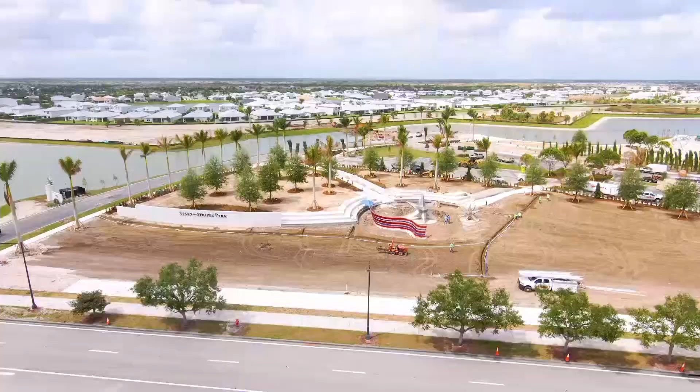The Naturally PSL initiative is a perfect example. Through the Naturally PSL Green Spaces and Places initiative, 744 acres of land will be developed as green spaces and places, including 198 city-owned natural preserves, 6 parks to be opened or improved, and 20 new miles of trails.

Tonight's awards honor the change makers among us, the individuals and groups who planted trees, cleaned up waterways, created Florida-friendly yards, and inspired the next generation through student-led projects.

We've launched a citywide innovation project by teaming up with the Bloomberg Harvard City Leadership Initiative, Center for Public Impact, and the Bloomberg Center for Public Innovation. Over the course of a year, we've worked with over 1,000 residents who generated 1,000 ideas, and all this work led to the city being declared an All-America City.

Let's continue to show the nation what Port St. Lucie is made of. Congratulations, Port St. Lucie.

Madam Mayor, that does not happen by mistake. If you really think about that accomplishment, how many years did it take for Port St. Lucie to get to this level? And it took this council, this staff, to make that happen. I'm so proud of the team that we have. But that's in the past. We can't dwell on the past because we've got to look into the future. As we always say, you're only as good as today. You've got to look ahead on what's next.

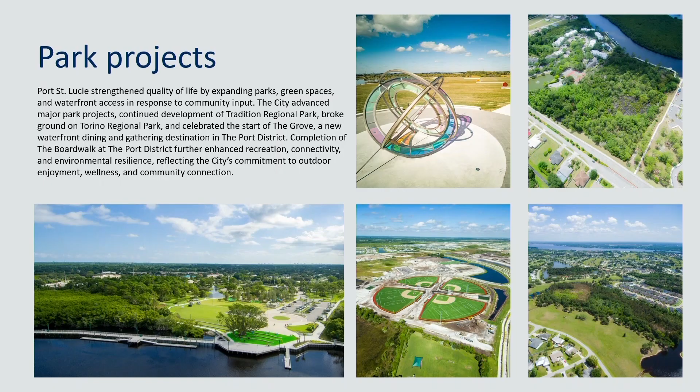All I'm going to say is Southern Grove - tremendous opportunity. I can assure you within the next week an announcement will be made that is going to make all of us proud, something we've all been looking forward to and wanted here. So that's all I'm going to say, but I think we're all going to be proud.

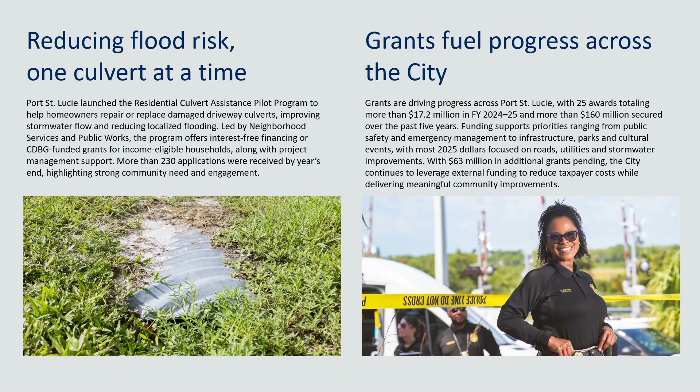Another area we need to improve is our flooding. We know we have flooding throughout the city, but I know Public Works staff is really focusing on how we get some of these culverts replaced and how we lower the amount of flooding we get throughout the city, specifically in the center of the city. That's an area we really need to focus on. Last year we increased our stormwater fund - a slight increase - and most likely there's going to have to be a future increase, but we'll look at the numbers and see where it lands. The bottom line is we are beginning the design process for some of those improvements.

One of the things I've always thought about is, I kept saying we need to be known worldwide - well, what is worldwide? But I think we've put our mark worldwide with Bloomberg and what this team, council, and staff have truly accomplished. I can see great things for the city. We're getting residents and other cities coming here to see what we're doing. I'm really proud of the city and staff on what we've been able to accomplish as a team, and there's a lot more to come.

This is one I'm very, very proud of, and this is really something the residents wanted, council wanted, and also the staff. Needless to say, we purchased 256 lots, 256 acres of land last year. The city eliminated over 1,000 houses from going in this past year. So that is something to be proud of.

This is just a small indication of where our dollars are going, just the general fund alone. Look at the improvements on our investment in capital projects. Why? Because the need is there. We need to invest into not only our buildings and facilities, but really the overall general fund. It's just needed - you know, just the improvements we made there at City Hall, on the lobby. These are facilities that have been there for over 30 years and really needed a small facelift, and there's more to come.

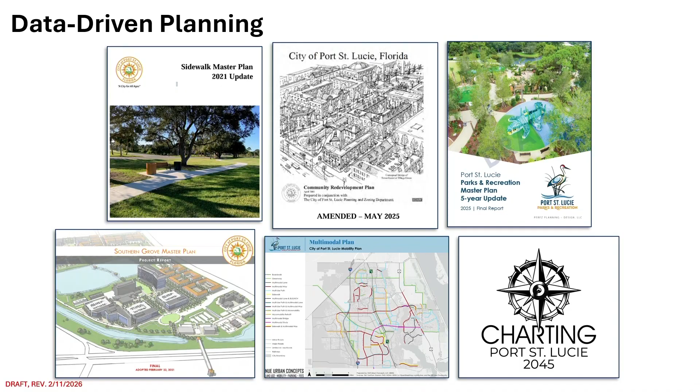Among the challenges especially unique to the city of Port St. Lucie and the Treasure Coast region is the rate of growth, growth that has arrived much more quickly than original projections, which makes things even harder. When you have a longer view on growth, it's a lot easier to get all the infrastructure in place to handle it. But the pace at which the city has grown is really remarkable in the region and in the state.

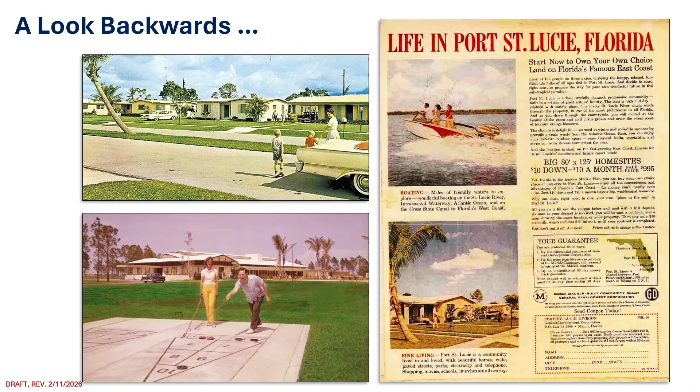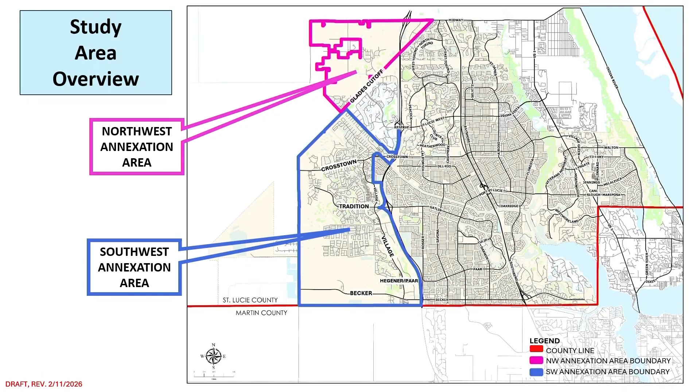When we think about the study area we were challenged to look at, this map shows the city, and our study area is really the southwest annexation area, identified in blue, as well as the areas that influence what happens there. The city now also has a northwest annexation area, shown in pink. The developments that have already arrived on the ground in the southwest area are identified in color.

Now, I was thinking about today's presentation, and it was nostalgic. I've been with the Planning Council 22 years as of next month. When I started, one of my first jobs was analyzing the transportation impacts of these DRIs. So it really has come full circle.

Back then, when I went out and did field work to understand what's coming in this area, there were mostly cows. It was really hard to envision that this would total 75,000 people in this area and around it, all fighting for space on the transportation network.

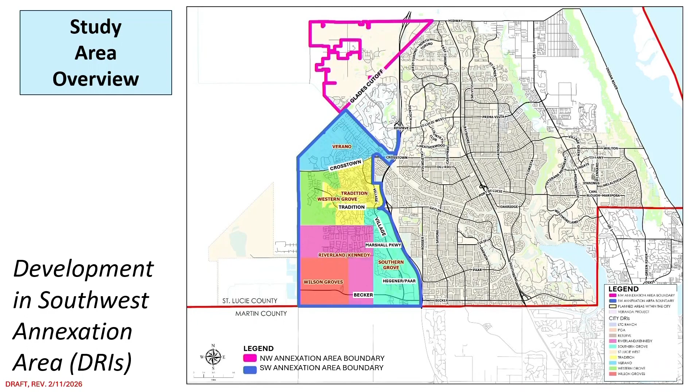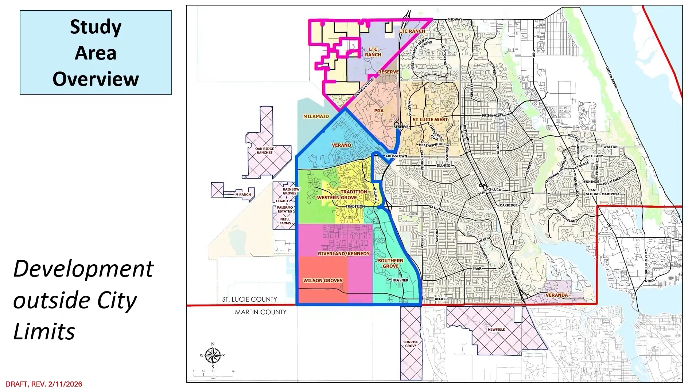In the northwest area, of course, those colored polygons represent developments that are known or inbound. The other new piece of information is all the development happening in northern Martin County and western St. Lucie County, outside the city limits. Again, there were just cows on that property when the first population projections were put together, and those are all houses and destinations now generating pressures on the transportation network.

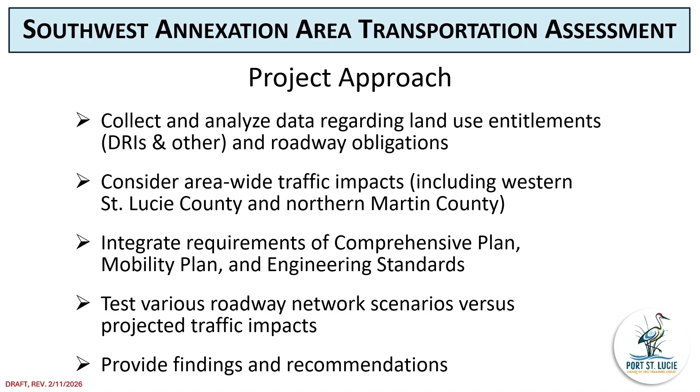So the approach for this project, as tasked by your team, was to look at those population trends and impacts, the infrastructure that's committed, and have a better understanding of whether or not three key roadways would be necessary to support the transportation impacts coming down the road.

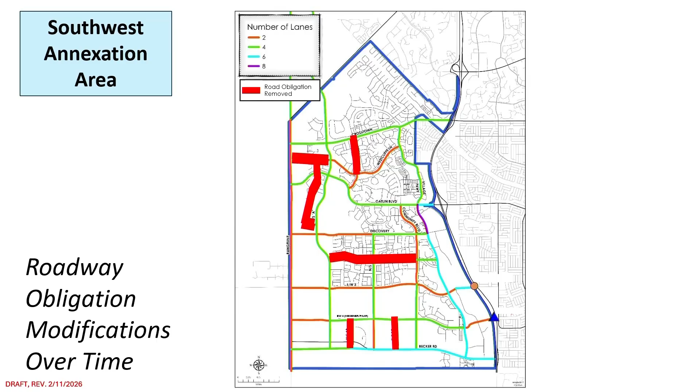Different things happened, and we talked a bit. It was a great question from Councilwoman Caraballo about how do you predict what happens. Roadway modifications get changed because markets change and economies shift. We've weathered a couple of recessions over time, and so some of the roadways were taken out of the mix.

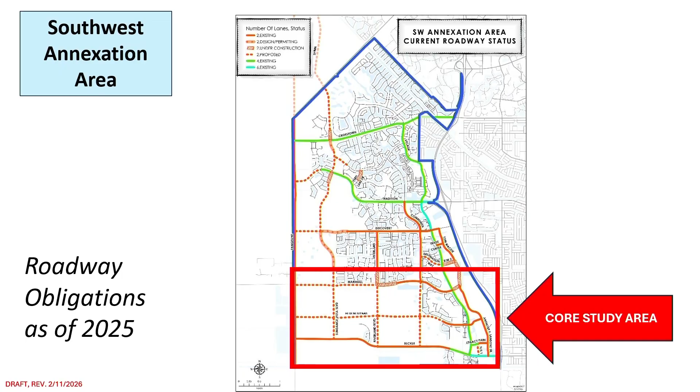Then there are 2 other roadway segments that we analyzed that the team asked us to look at. The first one is the Marshall Parkway interchange, which has been the subject of lots of discussion at the TPO. The question is, what happens when that interchange is built or not built within this district?

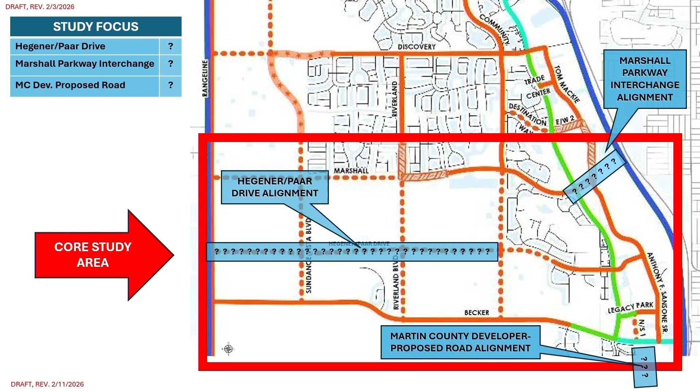The third segment that was analyzed is actually proposed by a developer to the south in Martin County - not proposed by Martin County, but by a developer within Martin County. That is a connection just west of I-95, which kind of aligns with Sansone Boulevard at the bottom right-hand corner of this map.

In developing the study, we did undertake some public engagement to be sure that we had the best available data, because that's always the challenge when you undertake studies like this. There were 2 outreach meetings that took place in November, one with our partner public agencies, including the TPO, DOT, and St. Lucie County.

We also met with the developer representatives for ACL, GL Homes, and Mattamy, along with their traffic engineers, just to confirm we had the right data in hand and the methodology that we're using to analyze the network made sense. There was a concurrence across the board that we were using the right data and that the methodology made sense.

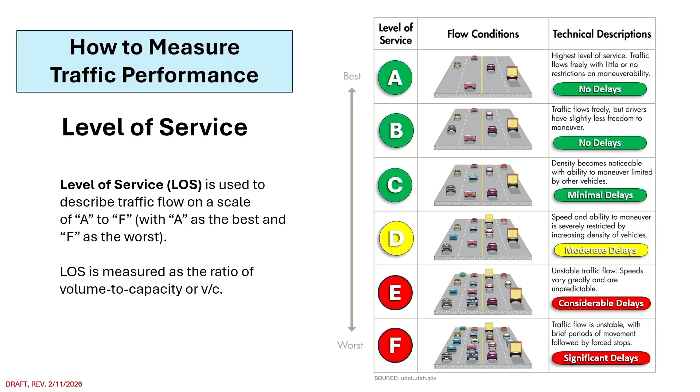With respect to levels of service for the study, what we did was pick a threshold of 0.7 volume to capacity ratio. That tends to be the ratio where, below it, you have free-flowing conditions. You don't have a lot of delay.

One thing to point out is that in the study, we were conservative in using average annual daily trips, or AADT. We did not do a peak hour analysis, so it's the most generous way to think about roadway capacities. We would expect the peak hour condition would be worse, and the peak hour peak direction would be even worse than that.

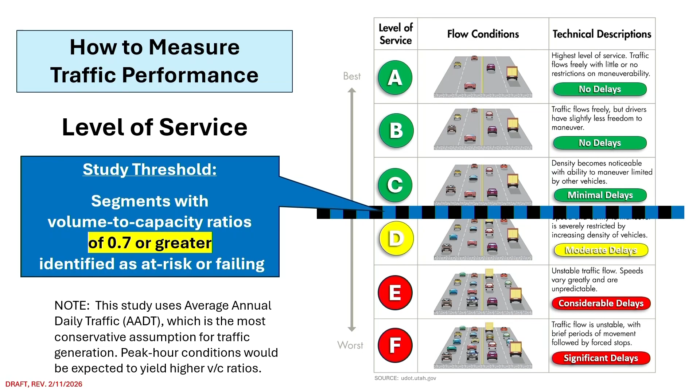But we're on the most conservative end of that spectrum, looking at average trips. Let me just check in with Kok Wan to make sure I've said that correctly. Kok Wan, am I okay still? Yep. Okay, all right, I'll keep rolling.

So to analyze the network, we developed a couple of scenarios. Remember, there are 3 roadways we're thinking about, and each is individual: whether or not Hegener/Paar continues to be maintained as the developer obligation it exists as today, the Marshall Parkway interchange and whether the city continues to advocate for it to be built, and the developer proposed road to the south, where the question is whether the city allows that connection to happen. They're each individual decisions, but for the purpose of the analysis we grouped them together to have some scenarios to test.

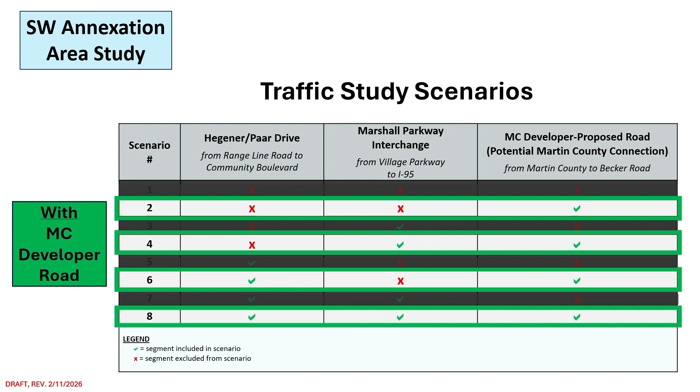That gave us 8 scenarios to test, summarized on this slide. To clarify, there are 4 scenarios that do not have the Hegener/Paar Drive, and 4 that do. There are 4 scenarios that don't have the Marshall Parkway interchange, and 4 that do. And there are 4 scenarios that don't have that developer proposed road, and 4 that do. That gives us 8 scenarios, all summarized on this table.

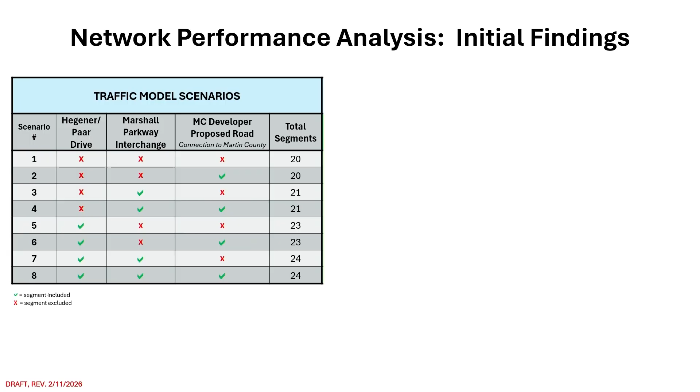Now this slide's going to get pretty busy because it has to do a lot of work - it's the main summary slide. We have 8 scenarios, giving us between 20 and 24 segments to test within that study area, summarized on the left-hand side. Remember, we're using level of service as our standard measure as we evaluate the performance of the network. So what happens when we plug all that information into the model is a forecast of about how much congestion there will be in the overall network based on those different scenarios.

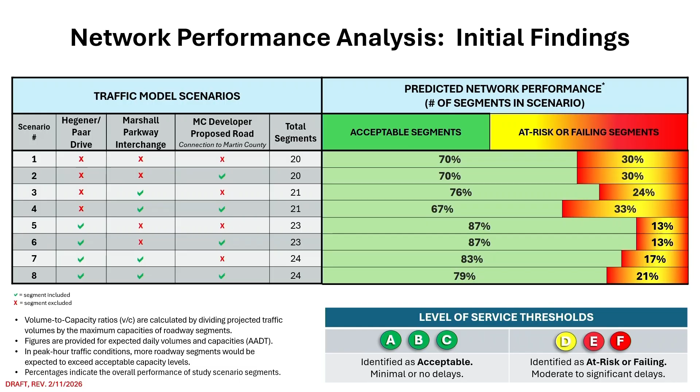The green side of that table is where we have what would be considered acceptable traffic flows, and on the red and yellow side, it's where the network starts to break down. There's really a clear distinction: if you group those scenarios where Hegener Drive exists, we would expect to have less overall congestion, less overall delay in the network than if we are without that road.

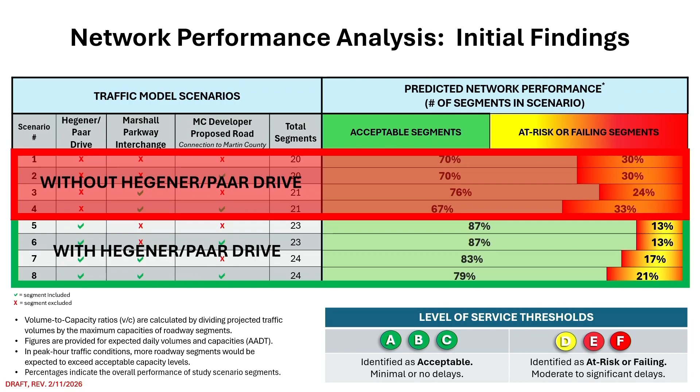I'll touch on those individual scenarios in the next couple of slides, but this is really the main research question for the study, and this is without question a fairly clear answer - the inclusion of Hegener/Paar creates a much lower level of congestion in the network. Not a surprise. The most competitive cities are always the most connected cities, and this is the finding we would expect to see in a study like this one.

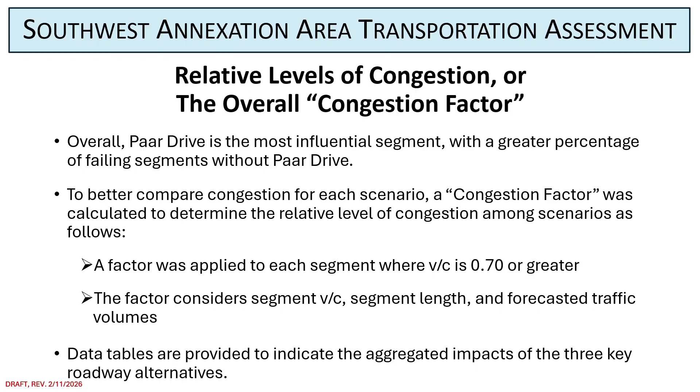But into the details, Kok Wan, in his transportation wizardry, developed an overall congestion factor for us to use as a measure when we think about the district - adding up all those different segments and all the different congestion expected, giving us an overall measure for the entire network. Again, focusing on those three particular roadways being analyzed, simplifying that in just this aerial because we don't have as much confusion when we just think about the condition today.

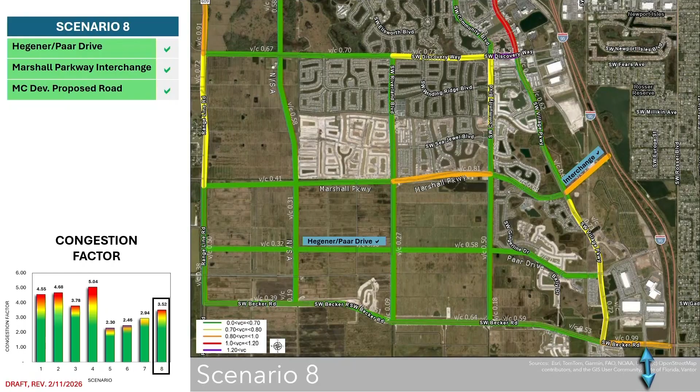So into conclusions, findings, initial findings. So what do we find if we zoom out? One, Hegener/Paar is a very influential and important roadway for the city. Every scenario that includes Hegener has less congestion overall than the scenarios that do not.

It also is an important reliever for both Marshall and Becker. Additional laneage capacity on those two corridors is pushed out further into the future. You also have better dispersion and more reliability. You have more resiliency when you have more connections. The most connected cities are the most competitive ones in every city that we look at as peers.

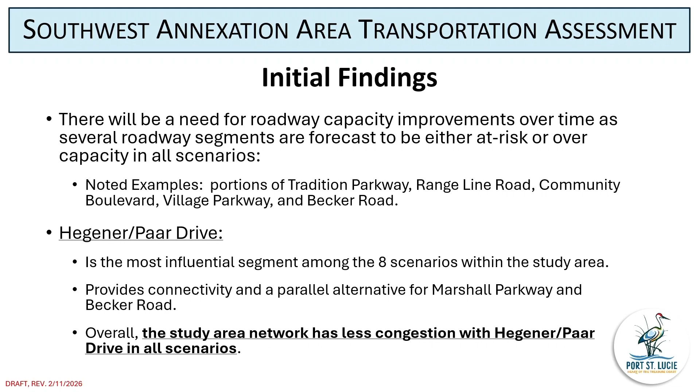There will, though, need to be a consideration for additional roadway improvements over time. When the Marshall Parkway interchange is constructed, if and when, Marshall Parkway will be a much busier road. That's an example where you may need to start to think about more capacity sooner rather than later. There are other segments that also don't have enough laneage to carry all the traffic volumes that are coming in. You have 75,000 residents and 53 million square feet of non-residential space circling around the district. It's not a surprise that the roadways will need more capacity to handle that. The noted ones—Tradition Parkway, Range Line Road, Community Boulevard, Village Parkway, and Becker—are all roadways to think about over time to add capacity.

With respect to the Marshall Parkway interchange, clearly it's going to relieve congestion at the two interchanges on either side. That's an intuitive finding—you would expect to see that, and we certainly see it in the data. It also becomes an attractor, and that's one of the things to think about. When you add a new interchange, it's going to pull traffic that otherwise isn't interested in going there. That really accelerates the demand for Marshall and really raises the question for you as a board as to what you want to do with respect to capacity on Marshall.

The north-south connector to Martin County is really complex. As we think about it as analysts for you in this study, when you add a new connection in a roadway network, you bring in more traffic. If you just look at that connection in its relationship to traffic congestion, I think, again, intuitively and in the data, adding a connection brings in more cars. So you're going to have more congestion on the network.

However, it also does other things for you. If you live in Port St. Lucie and you're heading south for work, instead of getting out to 95 and going down to your job, you can use that internal connection, and it might change your commute from 45 minutes to 20. That's life-changing for people. That's actually an economic generator for you because you then have the ability to reduce transportation costs, increase discretionary time, and facilitate more economic activity, or people get to the ball game to coach their kid, or whatever happens in that extra time you get back in your life.

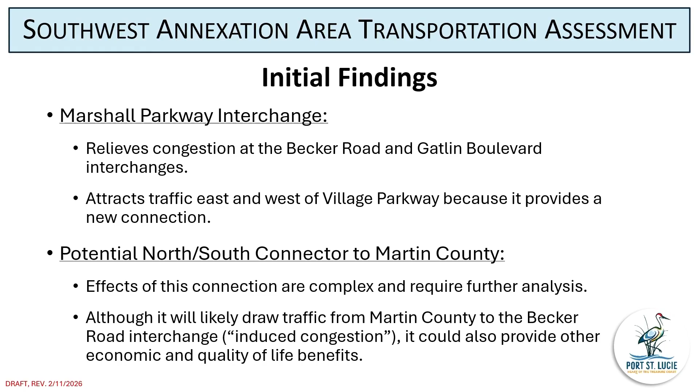With respect to recommendations, based on what we see in the data: one, the city should absolutely retain the development requirements to build the Hegener/Paar segment. When we tried to understand the impact of that segment, it's about a $27 million value for that roadway to be constructed in its current commitment, based on FDOT's standard calculating models. As an asset, it's $27 million of roadway and 55 acres of land in the 6th largest city in Florida. The value to you as a public resource is really significant. So whether or not that road happens in the near term or the long term, retaining it as a public asset for your community is a very strong recommendation from our review of the data and the city's request.

The second recommendation is the city should advocate for the Marshall Parkway interchange. It's an important interchange—it relieves the demand on the other two interchanges. It makes you more resilient, and it makes you more connected—all things that make cities more competitive. And then for the southern connection, the recommendation is the city should further analyze that connection. It's very complex. It has transportation impacts, economic development impacts, and quality of life impacts.

And you may have developer contributions to other roadway segments as a result of allowing that connection to happen, that could have other benefits for you as a city. So we would suggest that's an analysis that needs a little more thoughtful consideration as you think about what to do.

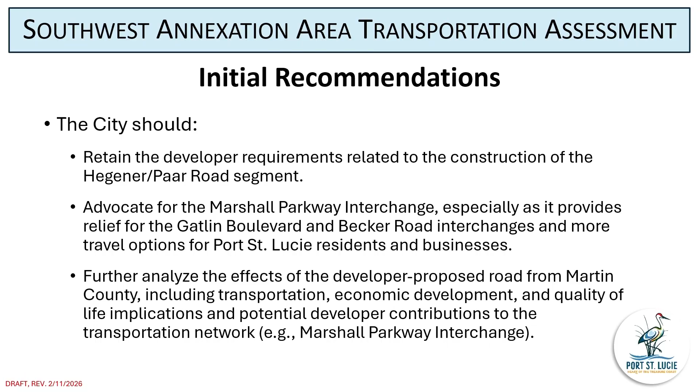Do you have a second? I'd also like to add to that—to explore having a second option into the Martin County property. I will amend my motion to include that, Councilman Pickett. And I'll second. Okay, second.

All right, I have a motion and a second. Any final discussion?

Shannon. Yes, workshop, informal—because they're being all lumped together, and I'm for one or two of them, but not all three, I will be saying no, only because they're all being lumped into one motion. Okay.

Any final discussion? All right, can we have a roll call vote, please?

Councilman Pickett, yes ma'am. Mayor Martin, yes ma'am. Councilman Bona, yes ma'am. Vice Mayor Caraballo, yes ma'am. Councilman Morgan, no ma'am.

Oh okay, we have one more. Sorry, these are the policy recommendations. Those were the specific ones.

As to the policy recommendations: continue to require road rights-of-way be dedicated with initial development approvals and a time certain for dedication. Require roads to be constructed earlier in the development timeframe with specific delivery dates tied to construction phases rather than pursuant to trip counts. Those are the two main ones. And then pursue additional land banking where possible for transportation, parks, preserves, and other infrastructure needs.

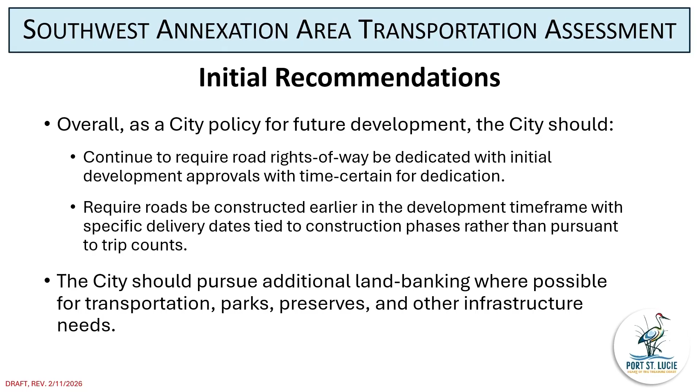Is there a motion? I move we adopt the recommended policy proposals. Second. I have a motion and a second. Any final discussion? All those in favor? Aye. Any opposed? Motion carries unanimously.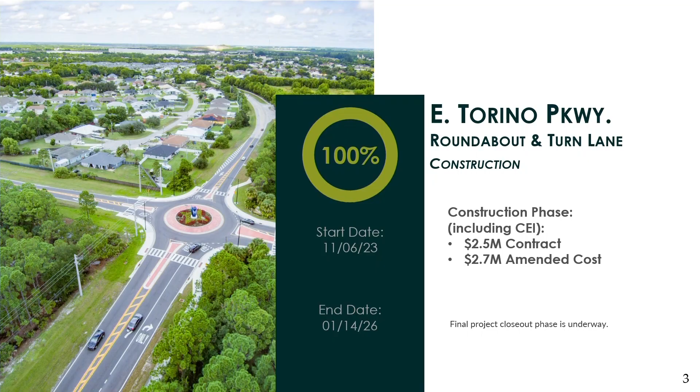Happy, happy. East Torino Parkway roundabout, another one completed, and the turn lane completed. I know everyone who visits that area has found it's a wonderful improvement, and the residents are very happy with it, and the artwork is fantastic. If you haven't been up there, please take a drive through because the pictures don't do it justice. One added note, and it's not us: if the school district would move the school bus stop, because it clogs the roundabout and cars are around it waiting for them to let off students. Please, hear me now, Dr. Prince. Relay the message.

Floresta Drive Phase 3, our third phase of the long-running project for Floresta, is well underway. We are currently on schedule, with a roadway section preparing to open here probably in April or May. A short section will open, another section will close, but it's essentially completely open except for final lift of asphalt, curb, sidewalk, gutter, sod, and landscape. This thing is going to look beautiful, almost like it's completed. So we're really happy to see it moving along and making pace. So far, no hiccups — let's keep our fingers crossed.

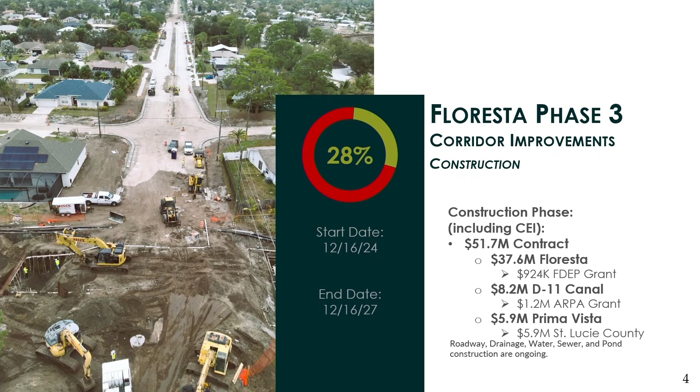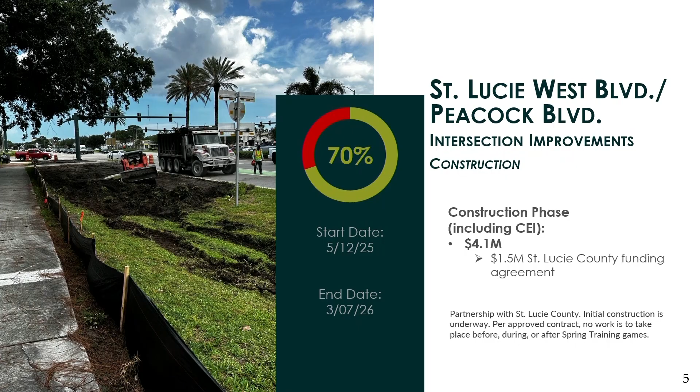St. Lucie West Boulevard and Peacock Boulevard, 70% complete. They are continuing the work there, trying as best they can to get everything done as soon as possible. As with most projects, unknowns happen and unforeseen issues happen, but we're still moving our way through that.

Tulip in College Park, the long-awaited project there is underway since Port St. Lucie Boulevard had ended. We held off on doing that one because we didn't want to cause too much disturbance with all the traffic. Well underway, things are moving forward currently, and we expect to see some completion in fall of '26.

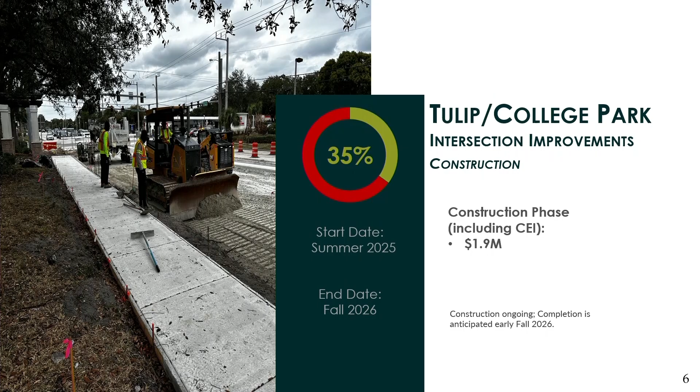Gatlin-Savona intersection improvements, another location that is very important. I'd like to piggyback off the previous presentation where we talked about studies and how things can change over time. When the project first kicked off, there was the design and the idea of what we should do there. But as we've seen with the explosive growth, there can be some additional improvements that will ultimately help us in the long run. So right now we're in discussions to look at a revised design and talking to the Department of Transportation about what that would look like.

We know that this is a very heavily congested intersection, and there are many, many residents who are waiting for us to do something at this intersection.

Not to belabor the point, but if we did what we originally thought we were going to do, or what was designed originally, it may not have been the best benefit to the residents long-term. So having the ability to take that step back, look at things holistically and make a change, although it may take a little longer to get there, it's going to provide greater value long-term. I just think it's really important to always remember that when we're dealing with these projects throughout the city, because of our growth and because of how we were originally designed.

Thank you very much for highlighting that. It is very important to state.

Hey Tom, when we do the Gatlin-Savona, are we going to address the stormwater issues in that area? I believe—where are you, at which location are you referring Savona to? Going to California, Savona going north? We have the design working up to the first intersection, the second intersection, to the north. So anything that's dealt with on the sides with sidewalks, you'll get curb and gutter, you'll get drainage. Okay, all right, thank you. And we'll take another look at it just to make sure, but I wasn't aware of that location, so I'll put it in my bank.

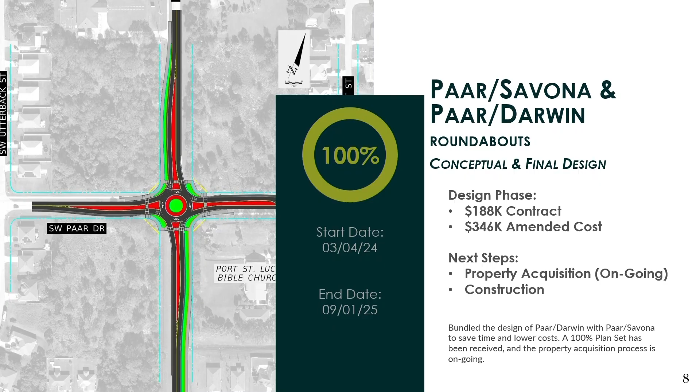Bayshore Boulevard, well underway. The design is nearly complete. We've got a little ways to go here to fall 2026. I say nearly complete because we're at the point where it's really fleshed out. You're starting to see what it's going to look like. You've got the basis of design, the residents are aware, and we're going to start moving into the property acquisition phase for anything that is needed so that we can get ahead of the game prior to construction.

So can we, as a council, see what that looks like? Because you're talking about property acquisition, and I know when the public engagement meeting was put on, there were some questions about the property acquisition and what would be needed. I think it would just be important for us to know what exactly is needed from a property acquisition standpoint, because there was some concern from residents. So we would be able to speak to it better when we're asked the question. That would be really helpful.

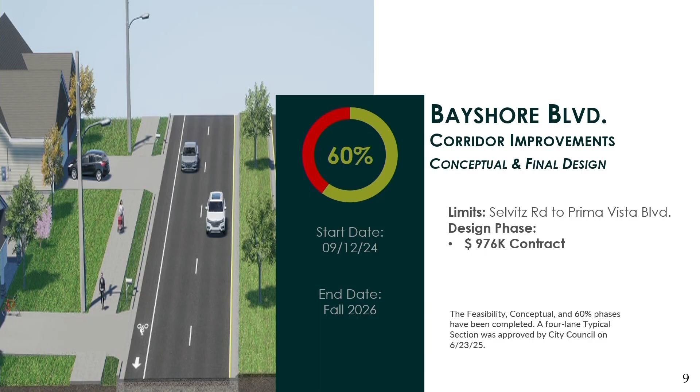We'll provide a list of what those are, especially with the design being almost complete, we'll know exactly what takes we need. So we'll provide that information. Great, thank you. Thank you. Yeah, now it's not speculative—you kind of know where you're going, so it helps to know that.

California Boulevard Phase 1 - staff went to Bloomberg Harvard for procurement information to learn how to do better procurement with our partnership. Right now we're waiting for a start on that. What we have is going into design build versus design bid build, so we're trying to learn how that process works and how to do it correctly. That's a new thing for our group, so it's taking a little lead time, but as we do, we'll be delivering on that product coming forward.

Savona Boulevard Planning and Conceptual Design - this is the feasibility study collecting data on what we should be doing out there, what we can do, and what you want to do. We're going to bring that before you as soon as it's complete, and we'll run you through all those options, similar to what you went through earlier this morning with the Marshall Parkway.

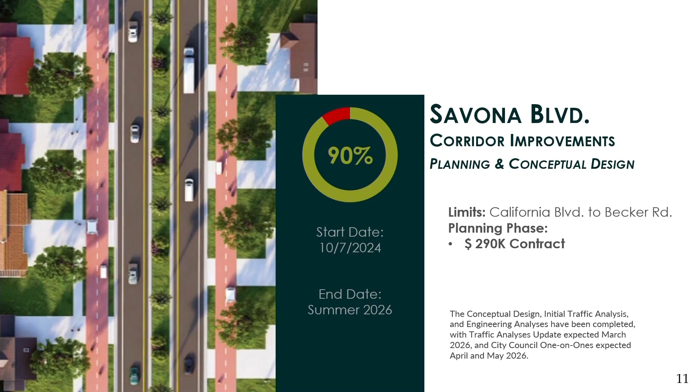St. Lucie West Boulevard, same exact thing, studies underway. We're getting there, should be having deliverables shortly to bring forward and show you our options, what they're going to do, and the improvements it can make. Some of these things may not happen, so we don't have the pie in the sky attitude that it's going to fix everything. What are the pros, what are the cons, and how's it going to pan out? That's also being done with our friend Kakwan, who was up here just a moment ago.

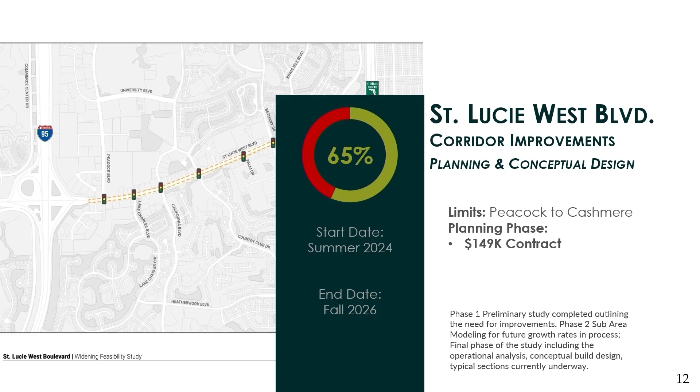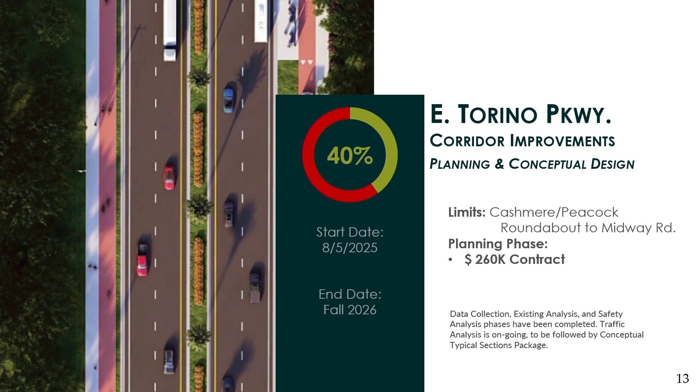Good morning everybody, Antonio Belstreri, Division Manager for Traffic Operations. Just want to make a quick note to the City Manager's earlier comments about roundabouts, not to take away the momentum, but we've seen so much - like we always see the expression on residents' faces when we explain why we're really focusing on roundabouts, and when we explain that it's 90% safer than traditional intersections, all of a sudden they get it, and it's a big deal. Just wanted to make that comment, we're seeing that in all our public outreach.

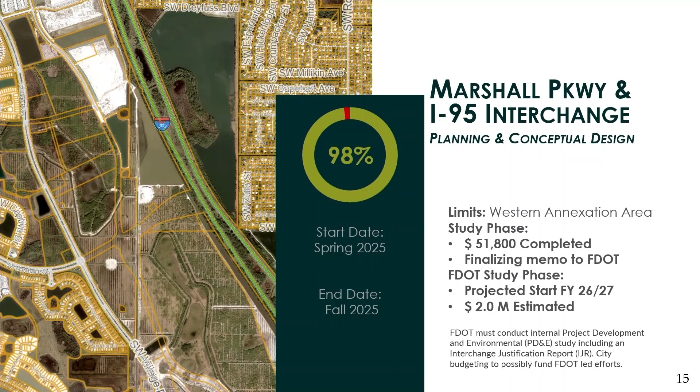In advance of the Marshall Interchange happening, we have more control over this intersection, Tradition Parkway and Village Parkway. The original scope of this project was to introduce protected intersections from a safety standpoint for pedestrians and cyclists. There was an analysis done that was presented to council, and the consensus was to go back and find other improvements that could be done, the cost of those improvements, and what could really help reduce traffic delays and congestion at this intersection.

I'm happy to say we're supposed to be getting 90% plans completed with left turn lane extensions, additional lanes for right turns, which we are going to end up bringing back to council to go over. I think it'll be probably sometime—we're going to work through that in terms of timing, but the goal is to keep this moving.

It'll act like a bit of a Band-Aid, if you will, before the interchange, if it occurs. So this is something that we really feel strongly about will help traffic.

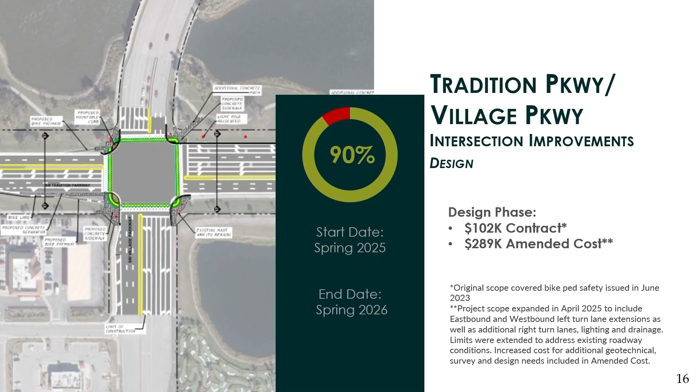This absolutely is a priority. I don't care what time of day you're out there. Of course rush hour is the worst, and I've been out there several times, but all day, every day, there's a lot of traffic out here.

We did have a public outreach in August. We wanted to be respectful of residents, wait for the summer, and as soon as everyone was back and school was back in place, we had the public outreach. We got different opinions and feedback, which we were able to bring to the design team and incorporate into the final design. So we're looking forward to presenting those to council and getting everyone's input.

I know we're going to get to the developer funded later, but this also highlights why North-South A is so critical, because coming from the west in this area, there's only one way in, and that's through Tradition Parkway. So it's vitally needed to get North-South A connected.

Mayor? Yes. When we do the Tradition intersection improvements, are we looking at timing of those stoplights there? Because it makes a difference if you can move more traffic off Gatlin onto Village, if that stoplight's red. So, what do we do?

So we've actually engaged a timing engineer, a traffic engineer who specializes in synchronization and coordination plans. We are going to be doing timing and coordination along the entire corridor for Village, from Becker all the way to Crosstown, as well as the Crosstown corridor. That's where we're starting from, knowing that's probably the highest priority at this point.

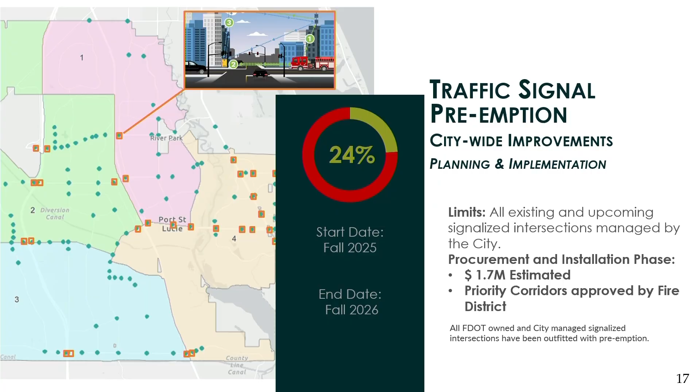Communications, if you could, they really need to do something informative to the public about this new signalization.

We were sitting there, and my husband said the light had just gone green, then it immediately went red, and he asked what just happened, why did the light go red. I said there's an ambulance coming. He asked how I knew that, and I said because I just know. Two seconds later an ambulance came through. I knew because I knew what we approved, but I want to make sure we're communicating to residents that if this happens, be vigilant, look behind you, there's an ambulance coming, see if you can make room, because it stopped.

We should definitely do a PSA about it, for sure, from an educational standpoint.

Shannon, I believe the fire district already has something about the preemption lights, maybe they could share it. They need to put that out on social media more. I've had conversations with the chief about upping the social media presence, and I know we just got a new PIO there, but it definitely needs to happen.

We've coordinated with the priority corridors with the fire district. When we started coordinating this with them, we went through presentations, and they actually have an app that, if you have it on your phone, will tell you something's going on, whether it's a fire truck or an ambulance. Some of our challenges have been trying to educate that this will likely cause congestion, but it's for the greater good in terms of safety, keeping emergency personnel safe, and getting response times to people's homes in emergencies. So it is what it is, but we're getting this done.

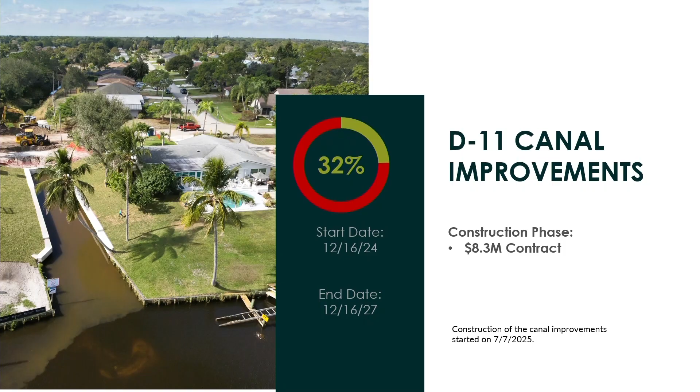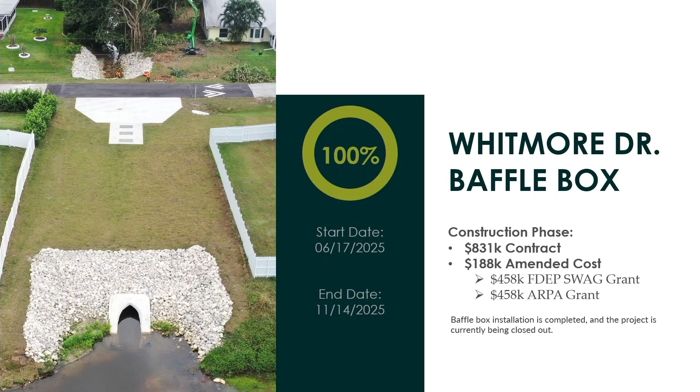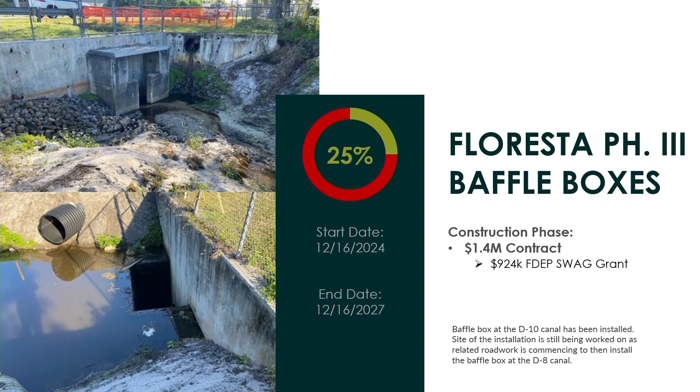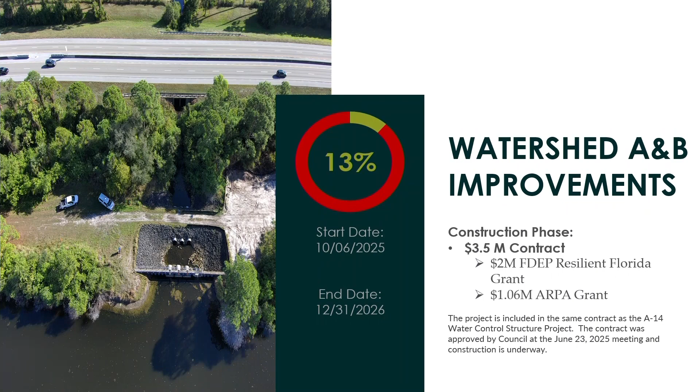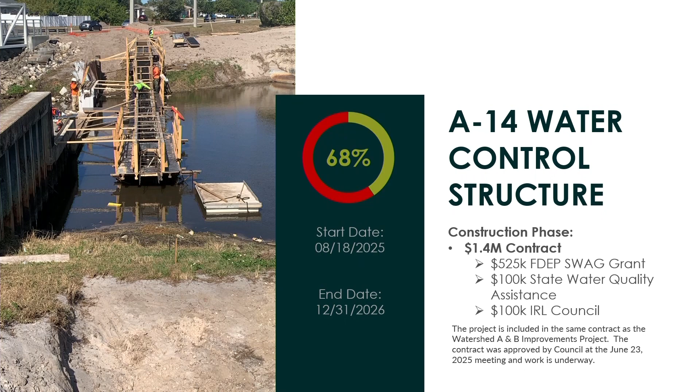Okay, so we can't wait till 2034. Right, we can't wait till 2028 for design either, so something's got to be done here. I don't know whether it's design build or what, but we'll go ahead and evaluate. Okay, get back with you. You're welcome. Okay, great.

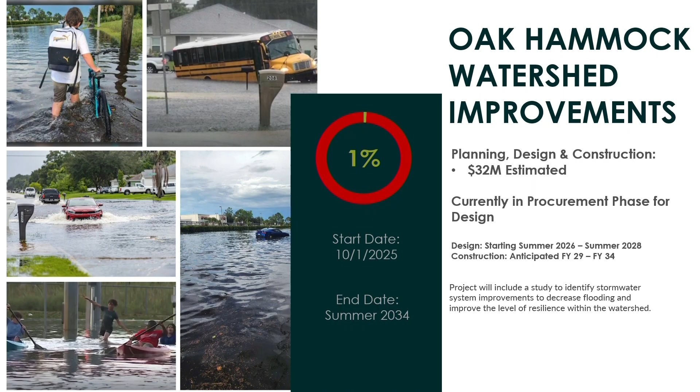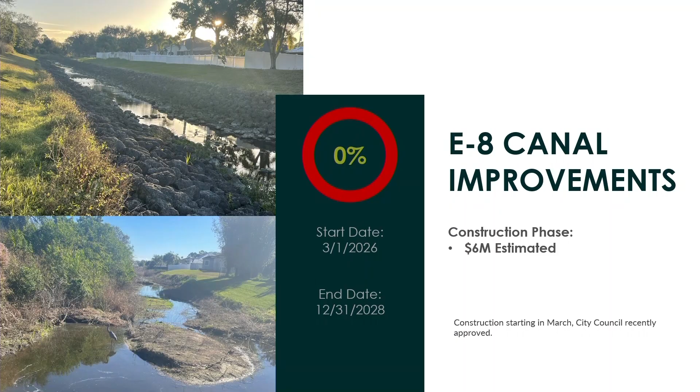This was just approved recently to go under construction, so that should start with pre-construction probably next month, and then moving forward on that, it will take about a year or so to complete that portion. There are other portions that we'll ultimately be working on afterwards, but this next phase will be starting soon.

Good morning. Morning.

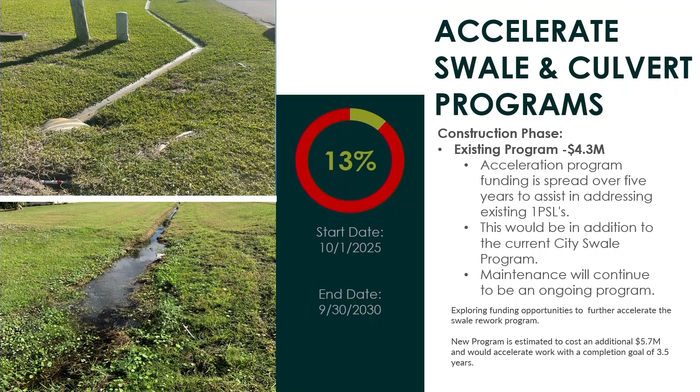Madam Mayor, as we do with the utilities where we provide a memo every quarter, we'll start doing the same here so you can stay aware of how many are coming through and how many are being processed.

Maybe you could just give us a more detailed report at the July workshop, as opposed to memos. If you want a presentation, I don't know how Council feels, but this way we have a broader view instead of doing memos all the time and wondering if there are too many memos coming out. I think it's more worthy of a presentation. All right, we'll get into the details of that one. Thank you.

And as I move on to the accelerated program for our swale maintenance program, currently we have...

1,301 PSLs that are outstanding for residents. New constructions, we have about 1,600, and also natural swales, we have about 308 that actually need liner replacement. As we evaluate the program, we want to look at how we can expedite this.

One of the things we wanted to do is seek funding that would give us the opportunity to hire more contractors to help expedite the construction aspect of it, as far as moving forward to help accelerate the program.

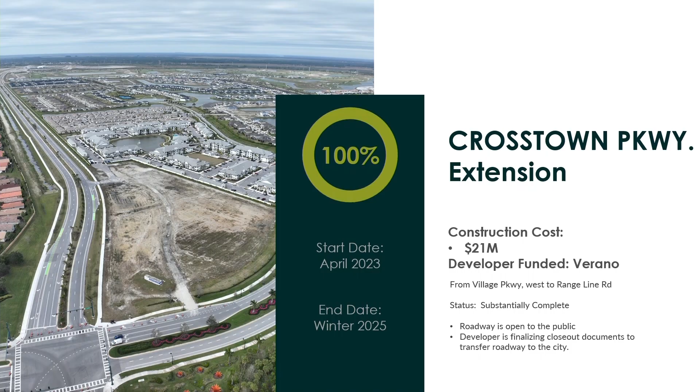This morning, I just want to bring you a brief update on the developer-funded obligated roadway projects. So Crosstown Parkway from Village to Range Line Road is pretty much complete as far as construction. We are going through the process of taking over this roadway obligation to the city for maintenance. So the developer is providing us with the closeout packages right now.

Marshall Parkway, Riverland portion from Parcel B, Phase 2, that portion is almost fully constructed as well, and pretty soon the developer will be turning it over to the city.

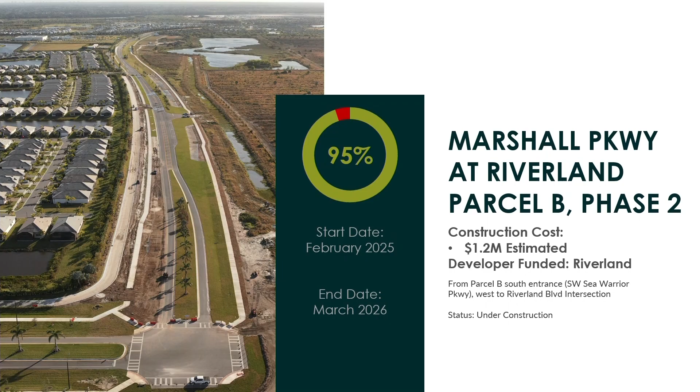Discovery Way at Riverland Parcel C, Phase 2, this portion is just starting construction. It is from the current ending of Discovery Way to North-South A, which would be the new name for it - Sundance Vista Boulevard - and that's going to be under construction pretty soon. They are actually started clearing.

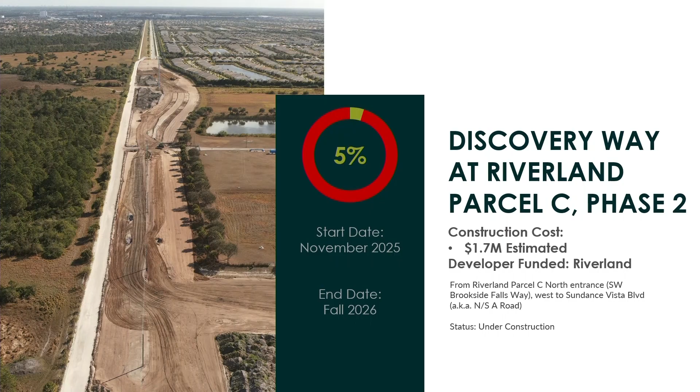Sundance Vista at Riverland takes from Discovery Way south to Marshall Parkway, and that is near the start of construction as well.

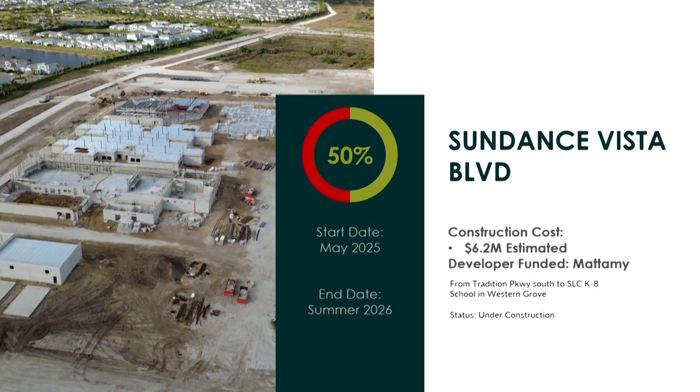So for clarification, North-South A is Sundance Vista. Yes? Yes, yes. So we're no longer referring to North-South A as North-South A, it's called Sundance Vista.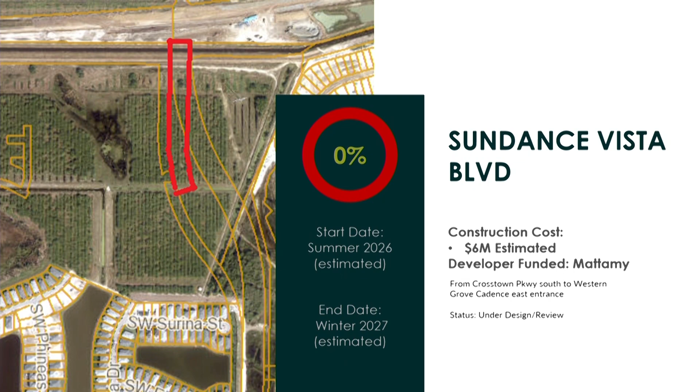Another portion of Sundance Vista Boulevard by Mattamy - this is just south of Crosstown Parkway. This portion takes it to the secondary access for one of the Cadence developments, and that is under design right now, and it will soon be under construction as part of their development.

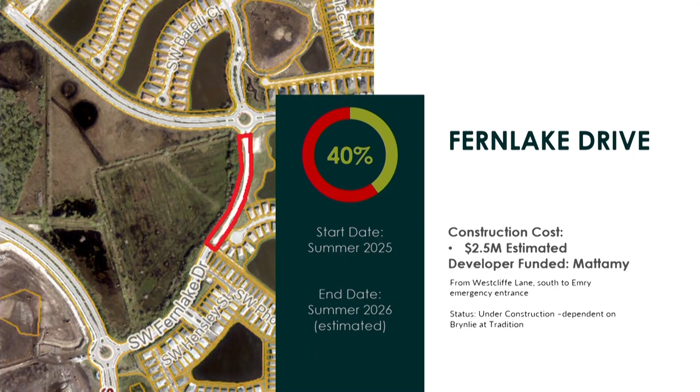Fernlake Drive, that's a connection that's been highly anticipated. It's under construction as well. It's part of the Brynlie development, which is just west of Fernlake, and that should be completed later this year.

And another reason why Sundance Vista / North-South A is so important, especially near the school, is not only for that connection to the school, but south down to Discovery. Also, the fire district is planning for our next 3 fire stations. Looking at the call volume and the calls for service, we're looking at Western Grove, and that location is dedicated right just below the school site. So in order to get that fire station going, we need to make sure there's road access there. And as I may have mentioned before, it takes 3 to 4 years just to get an engine, and 2 to 3 years just to get an ambulance or 2 that are needed.

Because we have such a long wait time for these vehicles, or this rolling stock, we need to make sure we're planning properly and comprehensively for those road accesses, so that when we need those fire stations, they can be open, but they have to have the road in order to do so.

Going back to that conversation, public safety isn't just about law enforcement or fire specifically. You need to have the roads and infrastructure in place in order for these stations to get built so that services can be provided. It's really important to get these infrastructure projects done, and to work with developers on how we can facilitate getting them done faster.

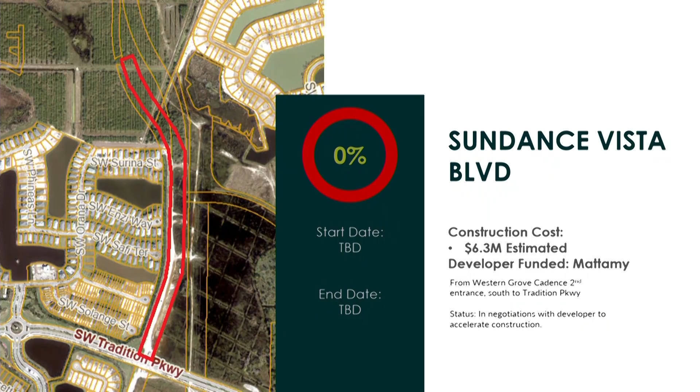Because we need to have more than one way in and one way out. Yes ma'am. Thank you, Mayor. It's Sundance Vista Boulevard, and as the City Manager just mentioned, that's under negotiation right now. Another portion is Westcliffe Lane, from the current continuation of Westcliffe to Sundance Vista.

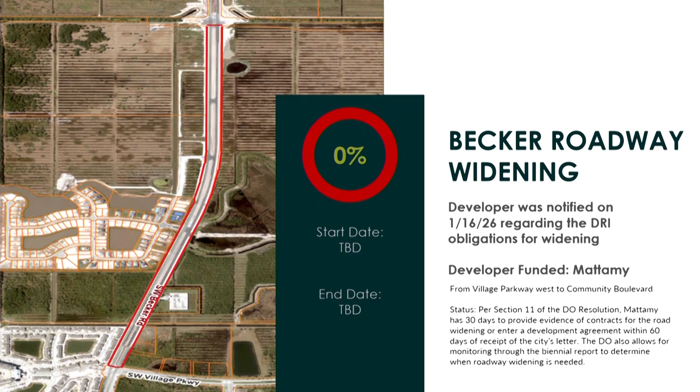That's also tied into construction of the development just to the south of that roadway. Becker Road widening from Village Parkway to North-South A, which is a continuation of Community Boulevard, and also Discovery Way widening between Village Parkway and Community Boulevard. Those triggers have been noticed to the developer and are under negotiation as well to get these roadways widened.

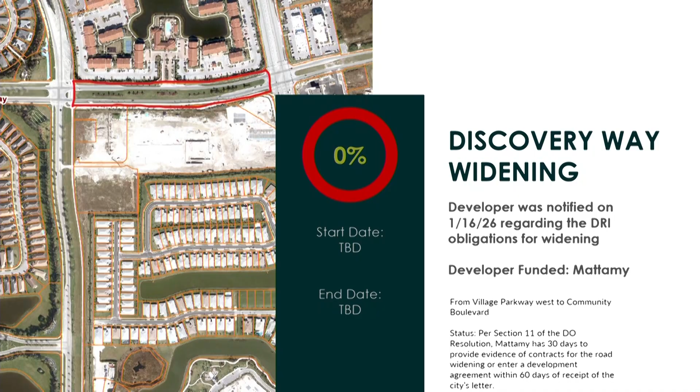One other roadway I didn't mention, to the north, from the developer that's just been completed, runs from Glades Cutoff Road to Wilder Parkway. Wilder Parkway was just completed to connect to the north, so we have that roadway in service right now as well.

Where are we with FP&L getting power to the signalization at Marshall and Hegener? I was notified that late last week the meter was installed, so they're working with the contractor to get it activated and put into flash mode. If everything keeps going well, once it's in flash mode for two weeks, it'll go active. So we're right around the corner.

Thank you very much. Okay, looks like we got Tom coming back up here. Flash, is that your name for him? Okay Flash, you got it. As soon as he gets the projects done in a flash, we'll give him that name. I don't have full control over that—there's a whole other system that runs it, but the state. No, you're pretty good at being in charge of it, you're the face of it. You own it, you got to own it. Very good, yes it's all my fault, everything is my fault. Blame me. So now you have a nickname. Oh geez. All right, Flash.

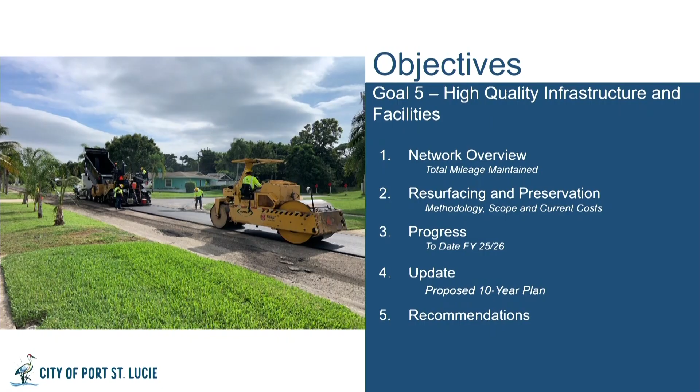We made promises to residents when we had the old numbers in, right? I just want to make sure that when we've told residents your road's getting repaved at this time, that those have been met, even though we may have different numbers now.

So if we follow the data, every 3 years there will be a reshuffling based on new data. What we have been doing throughout the life of the paving program is notifying residents when we talk to them: this is currently what it is. It may change due to budget. It may change due to new data.

We always, always, always point that out and make sure we're relaying that to them, because just because I say something's going to be paved in 10 years, if it needs to be paved next year and it's way worse than something else, why should I wait 10 years if it needs to move up? Conversely, if it's in good shape and something else is way worse, why should we spend the money? Although we have a plan set up that says we'll be there, it's almost diminishing returns with a 10-year plan.

It's really nice to see where you're going to go in 10 years, but the first 3 years are really what we should focus on, because when the new data comes in, it does cause that reshuffling. The first year is almost 100% guaranteed. Year number 2, 90%, because something may come up — a road may fail, a pipe may go down, something will come up and be brought to our attention. Year number 3, you're at 85%. But right after that, your first year again is 100%. So every year as we update the plan, we're definitely doing the roads we tell you that year.

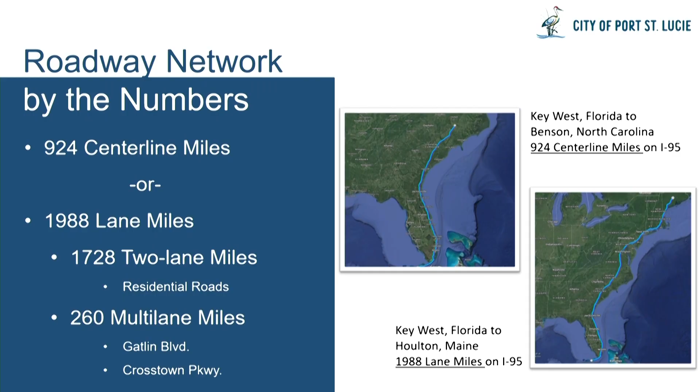If the roads are in great shape, such as in District 2 where you have a lot of newer roads, these are usually the main roads. There's a lot of planned unit developments, a lot of interior areas that we don't touch. Why should I go spend a bunch of money to pave a road that's in good shape when I should be taking care of the one that looks like the moon? So we've made an adjustment and started doing that now.

We've also included all of the roadways, because if you recall previously, CIP was taking care of multi-lane roadways, and I was seeing that was a disservice to us as a city and to our roadway network. So we pulled that out, and now all the roadways are being looked at holistically.

So if a main road, such as Airoso or Crosstown, has a worse condition than a residential street, but they're both roughly equal, which one's more important? I tend to believe it's the one that has the most traffic, the one that can affect the most residents, and the one that's going to fall apart the fastest because of all the extra traffic.

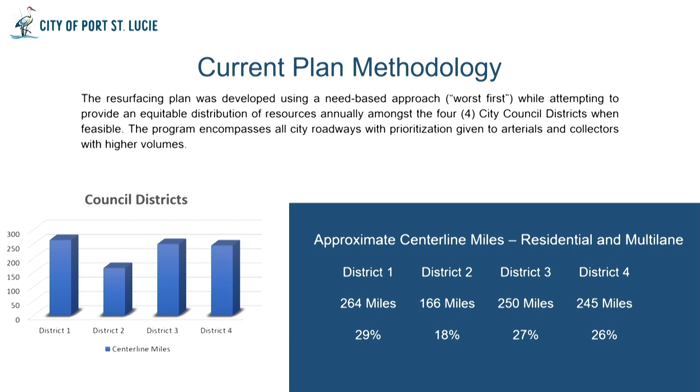Makes complete sense. So, Madam Mayor, just a question, Tom, as far as long-term strategy for the city. You have so many interior residential roads, so when I look at the resurfacing plan, maybe I'm looking at it the wrong way. I've always visualized that plan to be the internal roads for the residential neighborhoods. So with an arterial or a main arterial or minor like Airoso...

I would like to explore this discussion further with you, because when you're dealing with something that important and that much traffic, I want to make sure we're dealing with a long-term plan. So when you're resurfacing the road, you could also remill it, you could also really repair the road for the long term, and that might be a separate project outside of the resurfacing plan. When it's a big road like that with a lot of traffic, I almost feel like it needs to purposely be out of the resurfacing plan, because we should probably be treating it 100% differently because of the impact it has.

So it's whatever the council wants, but it's apples and oranges, I think, when we're talking about residential streets versus those two roads. And you're right, we do.

For example, Bayshore north of Prima Vista, it's a road that's been falling apart, kept falling apart. We paved it, it got worse again really fast. The data showed that it was falling apart faster. We went out, tested the road, checked it. This road needs to be rebuilt. The design is underway.

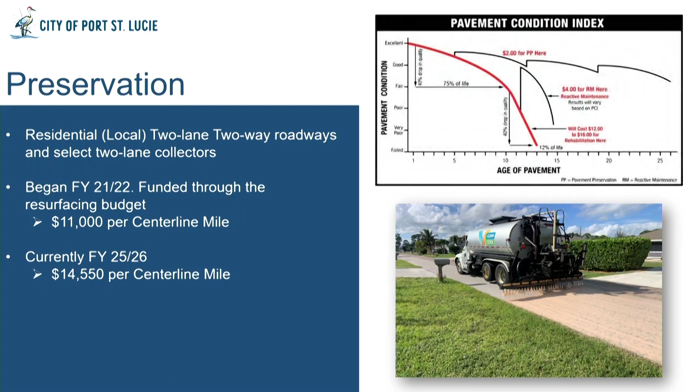Those costs have gone up, but not bad at all. Versus repaving a road, you're looking at $1.23 per square yard for spraying the rejuvenant on and getting 5 years out of it, or roughly $17 a square yard to resurface. And if you actually wanted to rebuild a road, to the Vice Mayor's point, you're looking at $29 to $50 a square yard. Those numbers get real big real fast with wider roadways.

I'm glad you put the costs in there because it's important to share with the public what that looks like, so I'll be adding those slides to my presentation too. Thank you very much. You're welcome.

Our progress this year, we are right on schedule. If you remember previous years, we've been behind schedule. Our paving vendor, who's been working with us for many years, actually put on another crew to keep up with our demand. They saw the need, they saw that we meant business and wanted to get things done, and they're doing a great job right now.

The paving year to year is scheduled around repairs to utilities, drainage, or anything else that may have to happen before we pave, because we don't want to rip the road back up afterwards. So prior to the year starting, once council usually receives this presentation, I provide the next year's 100% worth of resurfacing to all of our partners and colleagues here at the city. They start to build out what they need to do prior to us getting there so that when it's time to pave, we can go to work.

We have a couple areas being taken care of right now. Once they're done, we'll be able to release the resurfacing contractor to those. But with the cold weather, we haven't been able to go anywhere anyway, so I'd say we're right on schedule for the year, and here's some more.

Our pavement condition index from '22, '23, '24, you see it was rising. We had a big jump in '25 with our new data collection, and as you can see from the asterisks, it's the inclusion of the multi-lane roadways in the calculation. Again, these roadways are a lot newer, built to a better standard, and they fall apart a lot slower. So they added an additional bump, and that's okay. This is our adjustment year.

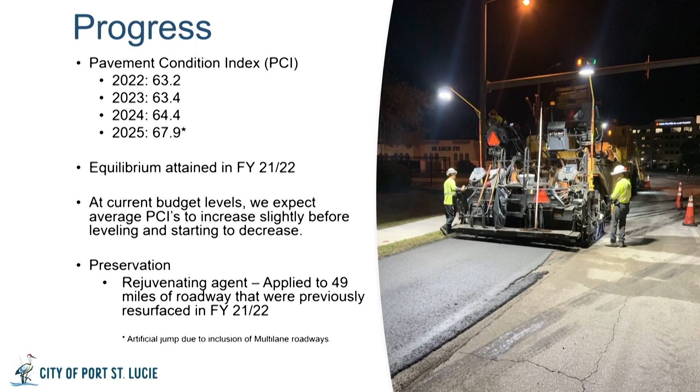We have applied all of our roadways that were done in '21-'22 because we're on our 3-year cycle. And here's the side-by-side. I know this is never fun to look at, it's not the easiest thing for your brain to collect on, that's why I provide the arrows.

So what we're saying is over last year's paving plan, we have added $0 to the 10-year proposed estimated budget. However, we have lost 28.2 centerline miles of roadway. This is simply because we've added the multi-lane roadways in - they're wider, they cost more.

This is the Band-Aid year - I'm ripping the Band-Aid off. I'm saying, for now, unless somebody tells me different, I want to show that this works. So we're not meeting the optimal 10-year goal. Again, I think it's an artificial number now that we're addressing the plan in a different way, and in a more holistic way.

Okay, we've kind of touched on all of these already. Contributing factors to why that drop in centerline mileage over the 10-year cycle - we've included the multi-lane roadways, and Gatlin Boulevard resurfacing is a big one. Gatlin Boulevard was added to the half-cent sales tax as one of the main projects back in 2018.

There was just a number assigned to it - I can't speak to where the number came from. It was $1.25 million. Over the years I've run some calculations, and I kept going, okay, it's going to be more, but I had to wait till we had funding to do a design. It is scheduled for next fiscal year for resurfacing through the half-cent sales tax at $1.25 million.

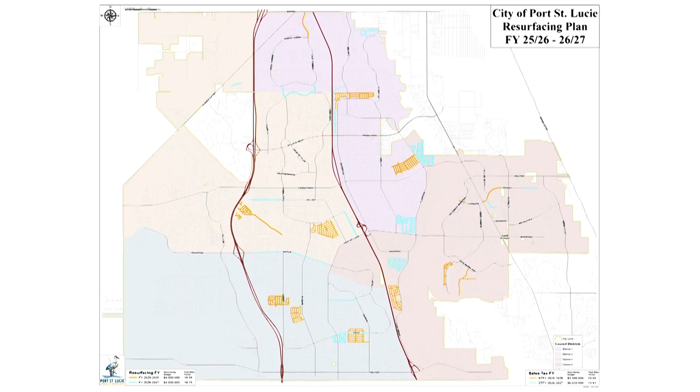Great, thank you. Okay, and the third and final option for the contributing factors, again, we spoke about it, is the new data, shifting things around to do the worst first because we are so far behind to try to get things done. Those are your reasons. And that follows up with our new maps showing what we'll be doing in 2-year slices. As usual, I didn't want to change format since everybody's familiar with it. Kind of showing you where we're going.

And then the one that really hits home, there's your 10-year estimated proposed plan. And our funding - I don't like the one on the right because the sales tax stops.

And the funding besides sales tax is also gas tax, I'm assuming? Yes. How is gas tax doing? I mean, it's supposed to be a regressive tax, it's supposed to be declining. Are we seeing it declining? And obviously, we all celebrate that gas is going down in price, but that also affects the collection of taxes. So what does that look like?

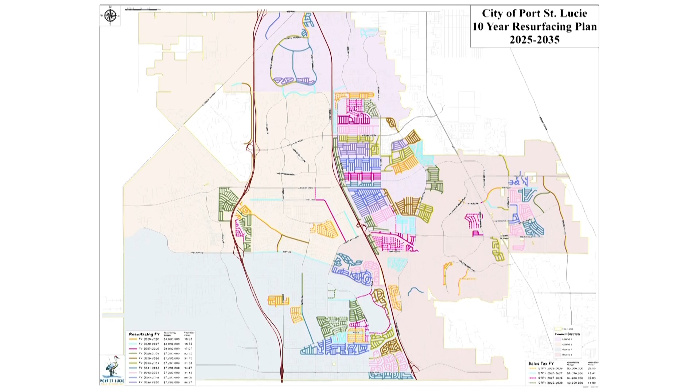Caroline, are you looking into that? She's looking it up. Okay. We do see slight increases, but that is more related to our population growth. So with more people moving into the city, living in the city, and frequenting the gas station. So that's why we do see a slight increase.

Well, with that, we're just requesting that you accept the roadway preservation and resurfacing plan so that I can release it to our partners in the other departments to start planning their work.

All right, do we have a motion? Motion to approve. Second. We have a motion and a second. Any discussion? All those in favor? Aye. Any opposed? Motion carries.